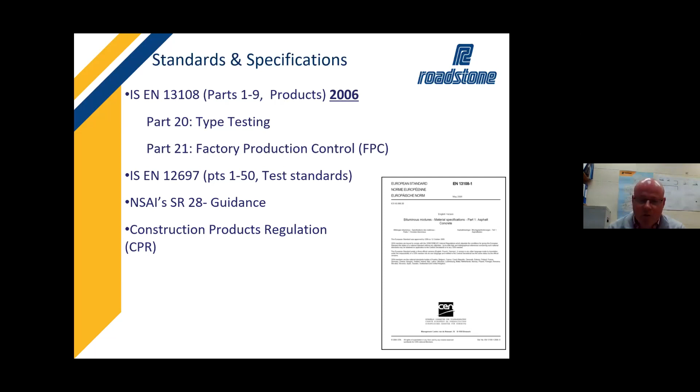Test standards are to the IS EN 12697 parts. There's over 50 tests there now at the moment. And of course, other standards that we're operating to in Ireland are the NSAI's SR 28. We'll go through that. That's a very good document for people to understand and know about. And also you've got the Construction Products Regulation that we're all operating to in Ireland for asphalt materials.

With the CPR requirements, all bituminous materials are to be CE marked to System 2+. That's a third party, such as the NSAI, comes in and audits an asphalt producer, to make sure that they're doing everything in line with the standards that are required for that product. Again, asphalt materials are a harmonized standard, so you have to produce a CE mark. Concrete, in another case, isn't a harmonized standard, so you don't produce CE marks and DoPs for those. So it's quite a different thing.

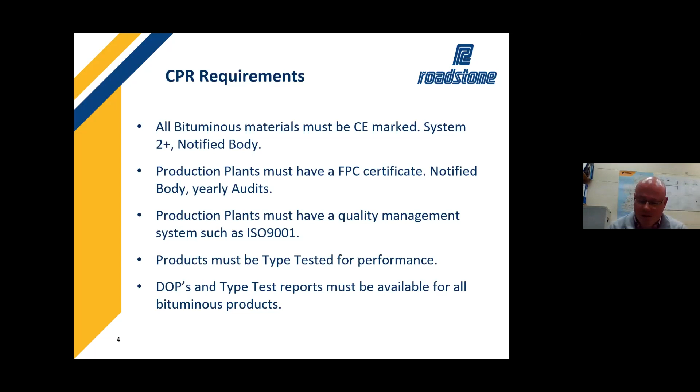In place in your company, in your actual production facility, you have your factory production control set up, you have a quality management system, and you're providing information relating to type tests and DoPs. They're very important things for the customers to actually take, and we'll go through parts of that further in this presentation. So the actual standards that we're producing to, the IS EN 13108, Part 1 is for asphalt concrete.

This is the old macadam specification. And you can see there just a little snapshot trying to give you an example of what the material looks like or how it's made up. It's a dense graded material usually. You do have open and medium versions of it, but it's also considered continuously graded. So the material doesn't have a sharp change in gradation. Now that does change up when you have open and medium grades, but the fundamentals of the material will be that it's continuously graded.

Your hot rolled asphalt, as you see there, the image of that, you have a lot of fines and then you have a certain amount of coarse aggregate. That amount of fines in it means that it doesn't have a texture of any nature, because it's so fine, it just produces a very flat surface. So in order to get that, you have those black chips on top, which is just pre-coated chippings going in. HRA would be a very popular material in Ireland over the last 50 years. But what's taken over from it really on the national road type works and different projects will be the stone mastic asphalt. To Part 5, SMA is a hugely popular mix.

It's got a stone skeleton in the mix, so you can see it's quite a coarser grade material, and that interlocks together and gives you a very high performing material for rutting, for deformation. You're also using good binders with it to give a good performance for water sensitivity.

Your porous asphalt below, we'll touch on porous asphalt as well this evening for sustainable products. And you can see that it's a more open material. It has interconnecting voids, so water can actually get down through it. And we'll display that later on with a short video that I have on a particular product that we produce.

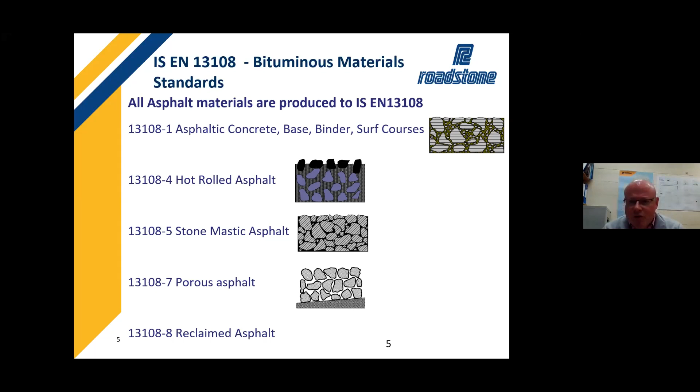Okay. In our actual production facilities, we run type testing on our products in order to produce them correctly to the European standards. We also have our factory production control system, which is to Part 21. And those two are very important documents to show compliance of our products on an ongoing basis at our plants.

On site itself now, there's a number of documents that people might use to show compliance with what is required by the client. So you have a document BS 594987, and that's a very good document. People use it for certain aspects, but again, it was sort of put together last minute because the European standards don't really deal with transport and lay and compaction of materials.

Here in Ireland, we don't have a version of that currently, but we are working on our own version, which is IS 844, and hopefully that will be coming out in 2022. It'll definitely be going out for a review in 2022. And people will get to comment on it.

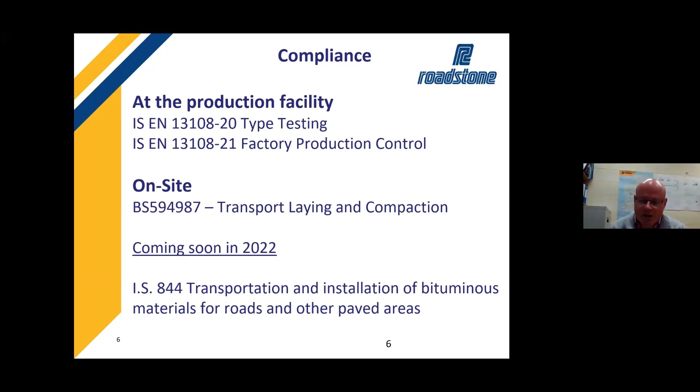Now, we'll go through a document here that we came up with previously, prior to IS 844, and we looked at why people weren't using some of these documents as well as they could. So really, we've gone back to basics on some of them and actually introduced a number of different things that made them more user-friendly. So we mentioned SR28, that's the standard recommendation for the use of the 13108 series in

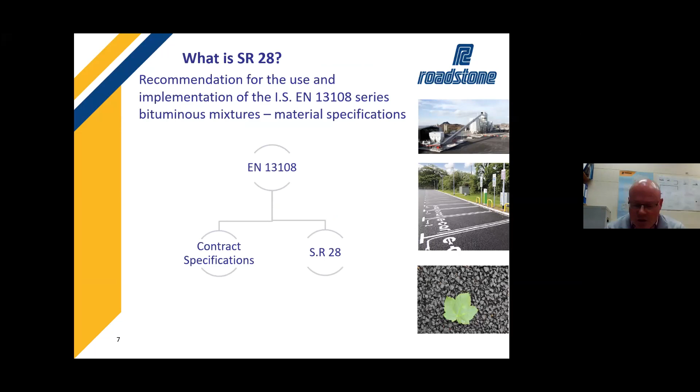Ireland. It's very important because it's directly linked to the 13108. And in Ireland, what we've done is we've actually broken down the basics of what are the end uses of these materials. Typically in Ireland, what should the mix design parameters be for the mixes, the composition and gradings of these, and conflicting requirements, just highlighting different things that we shouldn't be using these materials for or expecting certain performance categories of these materials, if we choose to use them. And again, we've got the mixture end use and pre-coated chippings, which is a specialist mix in Ireland.

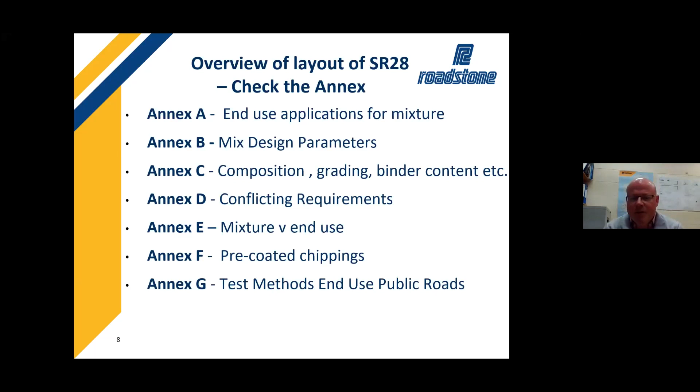Now, the reason why I've shown SR28, a lot of people maybe on this talk this evening aren't as familiar with the asphalt industry as they'd like to be. And SR28 is a very good document for someone to go and review and start to refer to with the types of materials and the end uses of those. So it's a very important document, I think, and a very useful one for people in the industry. So it's one to go and get if you don't have it.

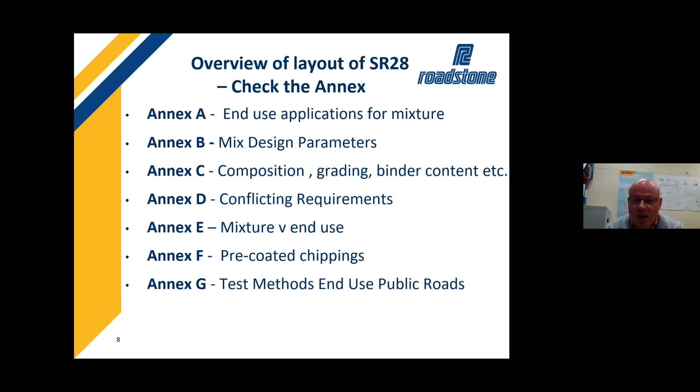Just to mention other specifications that are out there at the moment. You've got the likes of TII Series 900. Very important document there on national roads. Again, you might not be using this. This is high performance materials for high speed roads. And you might not need that in the situation you're looking for.

But what I would say, back in 2015, TII reviewed what they were doing, overhauled basically the Series 900 and took a different approach to how they wanted to have materials used on their roads as well as how they're designed. So previously you would have looked at recipe type mixes in there. They went down the design performance route with the new 900 series. So you now have a good focus on the air voids in materials, how stiff the materials are, what their water sensitivity performance is, what is the rutting performance of these materials as well. So a lot of high performance testing in there.

And in fairness, we've been working on it with TII over the years. And what we're looking at now is that they're maybe going to reissue a new version of the Series 900.

Maybe in 2022, I believe that they've been working on it, and I think they're awaiting comments from industry. But really, they're reviewing all these categories and performance levels that they've looked at over the last few years and seeing what they believe they can use going forward.

Now, another thing that will be coming out maybe in 2022 is the Irish Analytical Pavement Design Methods, which is again from TII. This is taking, I suppose, the actual performance of materials and designing the most efficient pavement possible for it. And so this is another approach to how to design pavements. The standard design methods at the moment nearly always bring you back to a minimum depth of a pavement, not really mattering how much traffic is going across it. So you never really get away from a sort of a standard pavement depth.

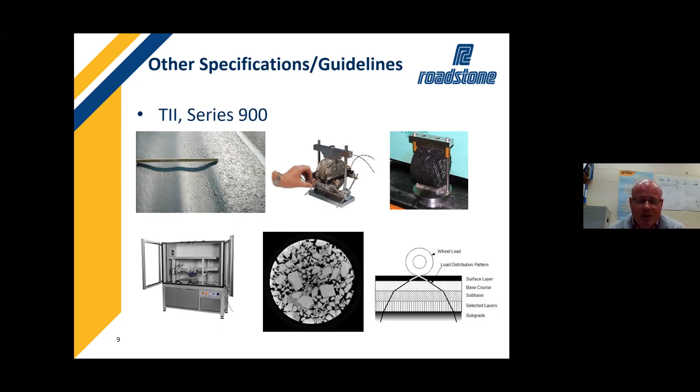Other specifications that you'll see on a regular basis, look, the Department of Transport and the Road Management Office have the orange book and the purple book there, typical uses for those. As I'm the IET chair, I'm going to give it a bit of a plug. We have the surface dressing guidelines for the IET. This is a very useful document.

What you'll find is it gives very good information on your constituents, on worked examples of how to design surface dressing, how to install it, and then aftercare of that as well. So it's a very useful document for especially the county council engineers that are out there, and the work that they will be doing on an ongoing basis on their pavements.

And outside of that, then you have the likes of the Ministry of Defence type documents. There's a series of these, and again, these are maybe slightly more not in common use across industry in Ireland. It's aimed more at the airports, but they might be documents that you come across every now and again. But they're there, they're in use. Most common ones, of course, will be what we've gone through already.

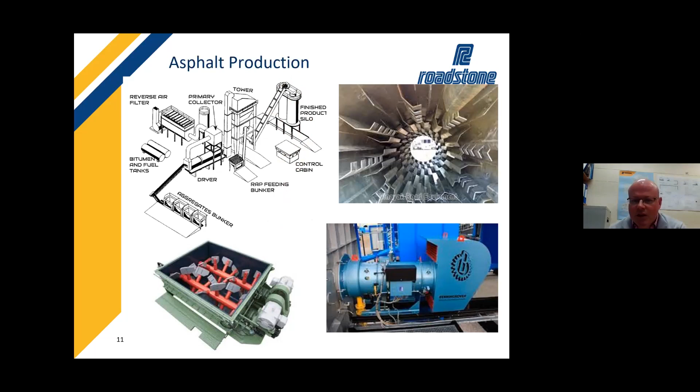Okay, we're going to touch on now the sustainable end of the asphalt industry and what we're doing currently to make ourselves more sustainable and how we're trying to become, I suppose, a bit greener. In the most prominent areas of this, we're leading the way with reclaimed asphalt. You have SuDS asphalt, we'll touch on that, and then there's warm mix asphalt as well. Three different things to go through and give you a little bit of information on.

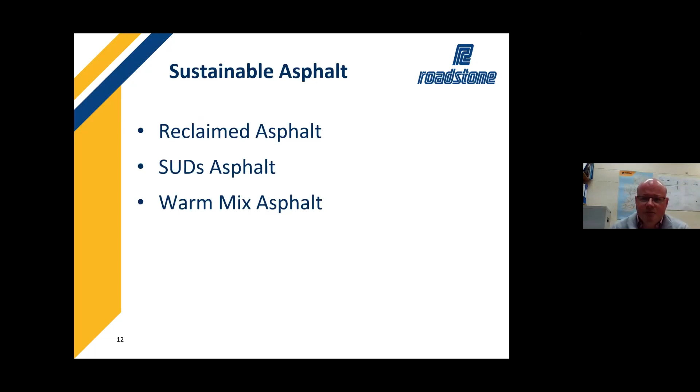Reuse of asphalt is a very important thing that I suppose we're getting to grips with in Ireland. Reclaimed asphalt has its own European standard, IS EN 13108 Part 8. It is 100% recyclable back into new hot mix asphalt materials. By recycling or reusing that reclaimed asphalt, you have the savings on the aggregates that would have to be produced, and of course the transport of those, as well as the bitumen that was being used. So it's a massive part in making our industry more sustainable, achieving a good level of recycling or reuse of these materials in an appropriate manner.

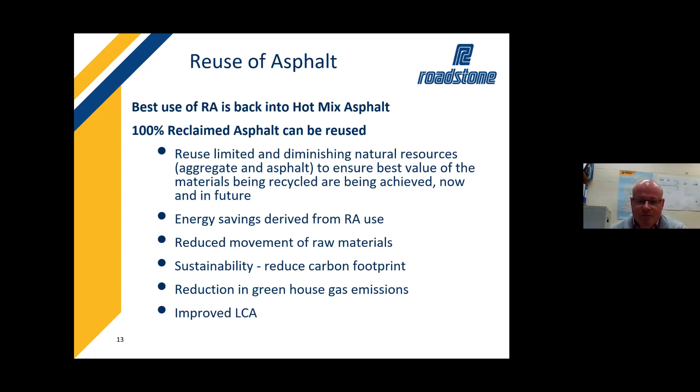Through this, we're going to have an improved LCA for these products. We're going to reduce our greenhouse gases. Now, in your ton of asphalt, we just did a calculation on your CO2 equivalent kgs per ton, and the two that you're saving on when you're reusing reclaimed asphalt are the aggregate amount and the bitumen amount. You can't recover the mixing, you can't recover the heat nor drying. Those things are lost essentially, but because you use the aggregate and bitumen again appropriately, you regain those, and that's recovering it.

Now, it's important to understand how you recover that, and that's through hot mix asphalt, because you're actually activating the bitumen, and so you're roughly recovering about 44% of the CO2 that was used. If people believe that by using reclaimed asphalt to build up road verges, that's recycling, really all that you're even getting close to recovering is that 4 kg. You're not getting close to that. You're only making a saving of maybe 8% of that CO2 that could have been saved. It's a minute amount compared to what it is.

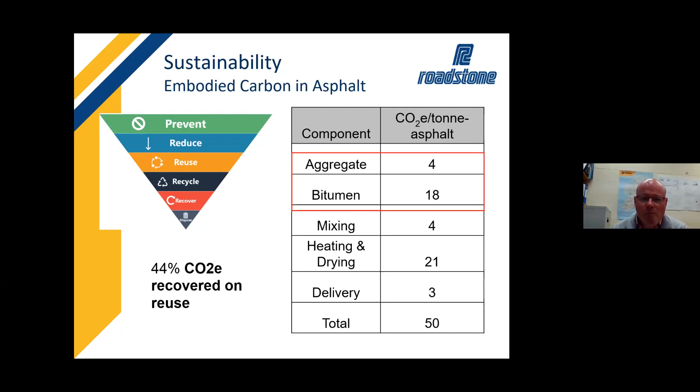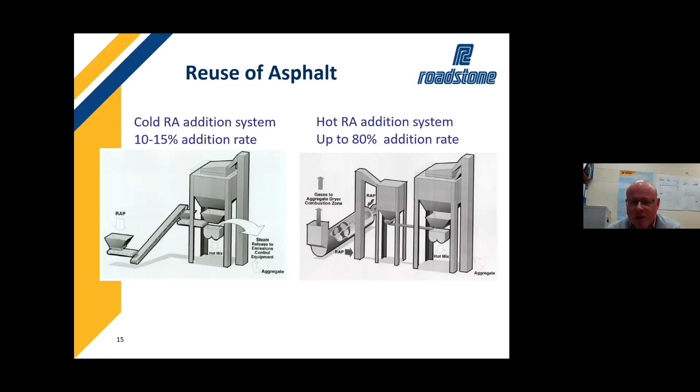When you're using reclaimed asphalt, you really have to have a good knowledge of what the RAP is, where it's come from. As you're using it, you need to be aware of the moisture content in it, binder contents, the properties of the actual RAP, so that you can design properly a material that will be suitable.

Again, you're trying to take out some virgin material, some virgin binder, put back in this RAP binder and the reclaimed aggregates. So you want to be sure that you're getting an equivalent material at the end of this, that you're not giving a lesser material.

And that's a preconception sometimes, that when you've recycled or reused reclaimed asphalt, that you're not getting that equivalent material, that you're not getting the same base or binder course that you had previously. That's not the case. When we're designing it, you're designing to have an equivalent material to meet those standards that are in place, so that it is going to give you the same lifespan as you had expected.

In Ireland, we're not currently recycling into surface courses. There have been trials carried out recently, I believe, with TII, and they were there a couple of years ago as well. It can be done, but I suppose there's limitations as to what can be done with it at the moment, as it's not within the Series 900.

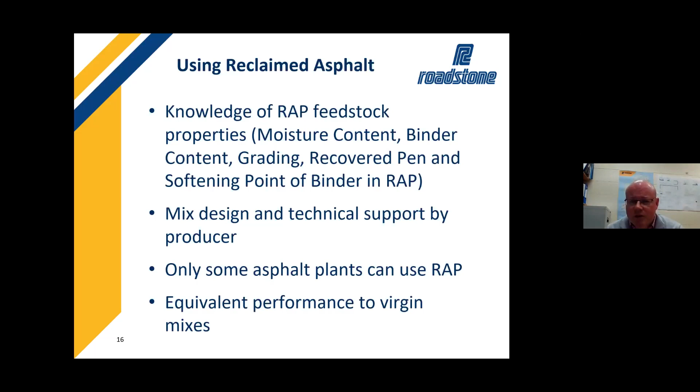That doesn't mean it can't be done on smaller scale works outside of the TII type works. This is a potential to be used in any type of contract if between the producer and the client an agreement can be made.

So another sustainable part of the industry, and I suppose no better time maybe to show this after the storm there over the last few days, is sustainable urban drainage systems. And this is trying to manage water and runoff on your site and not to have it causing flooding in different urban areas. And again, we're constantly building, we're constantly expanding. So we really have to manage this going forward, that, you know, we can all see the effects and what we can do about it now.

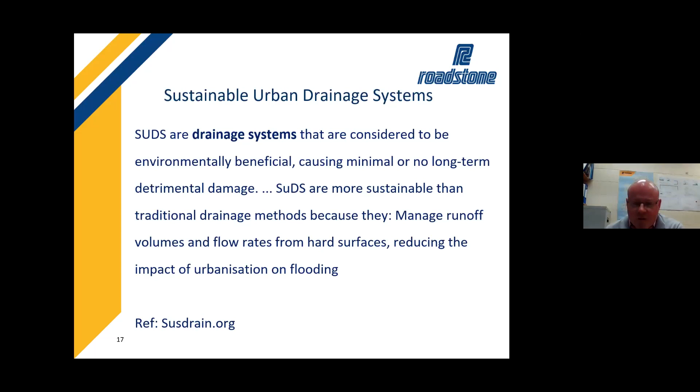And there are products there that we can use to help with this on different sites. So we have a DuraFlow porous asphalt. It's a SuDS system where we have a fully porous pavement. So you'll have a porous surface and binder course on top of a coarse grade of stone that sits on top of a geotextile or a geomembrane of some sort, maybe even a geogrid if it needs it.

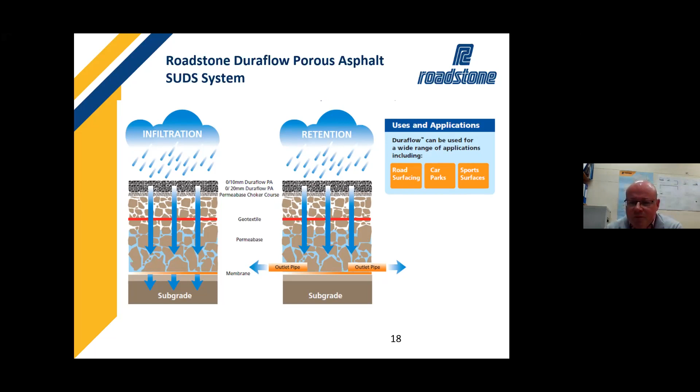And what that allows is the water to pass through the asphalt layers in situ on that spot, right there where it is, and then stores that water until it can either infiltrate through to the ground beneath, or you can attenuate it away through some pipe system. It's become very popular over the last few years, and we've done a number of large scale works around the country. You can see just a lab compacted specimen there, and the water just flowing through it.

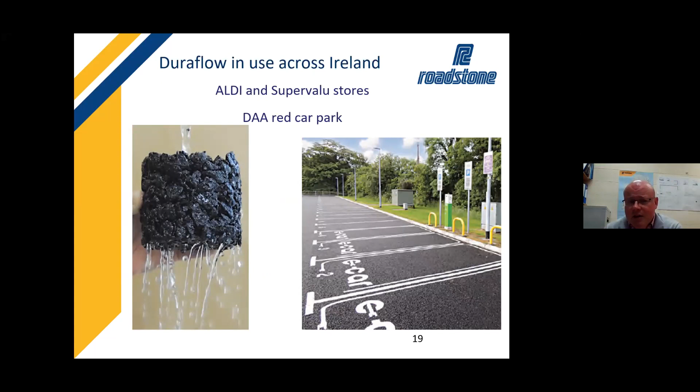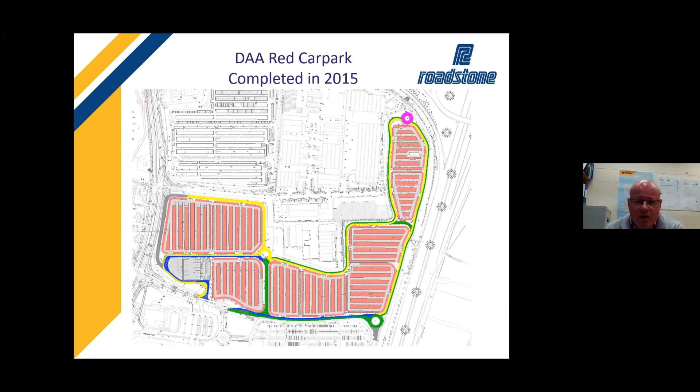The right hand side there is the Carrick Mines Park and Ride. I think we've got that down nearly 10 years at this stage. And we've also got the DAA Red Car Park. That's the overview of the site. I believe it was about 62,000 square meters of Permeabase DuraFlow put in on the site. It was a huge site. We believe it's one of the biggest SuDS systems in Europe. And it is a fantastic job.

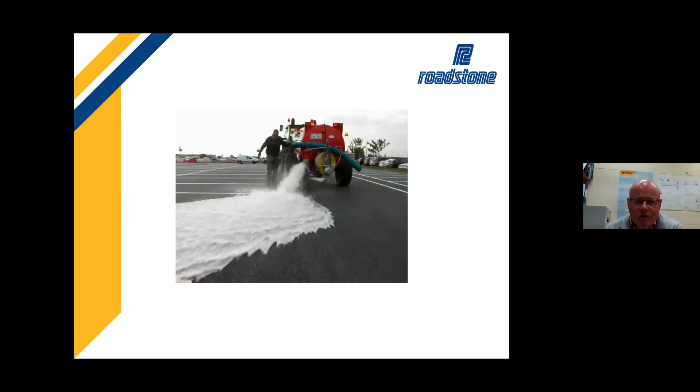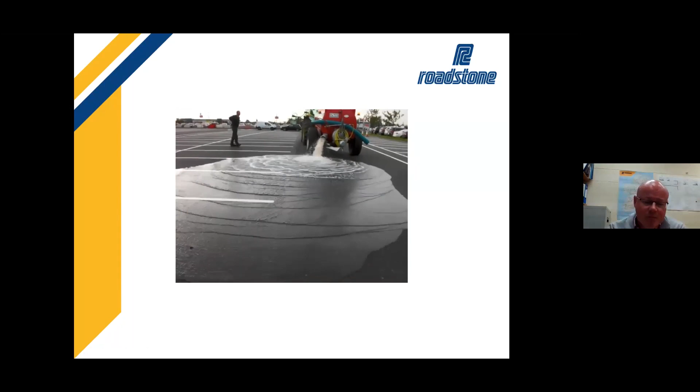We have a short video here to show you. Let's just see if it plays. So what the guy said, where the tractor is, you have standard SMA, which falls to the parking bays, which is all DuraFlow. So on the left hand side, you can see that the water is spreading out. And we'll just fast forward a little bit.

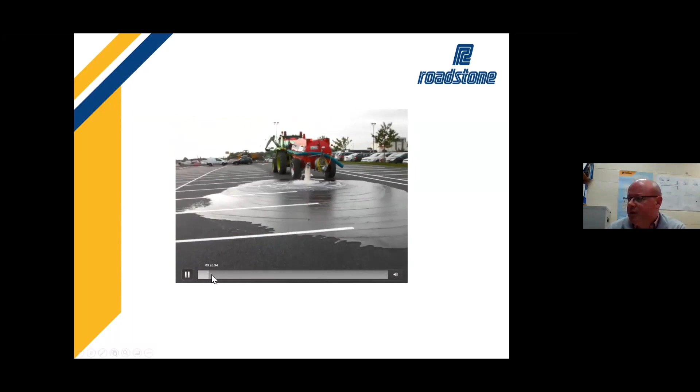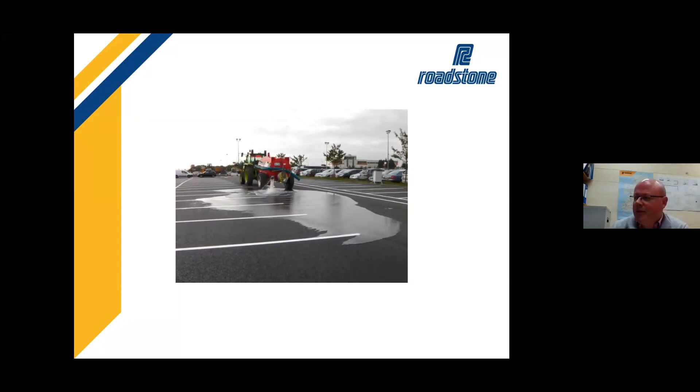Forty seconds in, and you'll just see the water flow is still high, but the water is really dissipating across the parking bays very quickly. The influx of water is very high into the material at that point, and the product can handle it. It's a very, very open material and porous, and the permeability is excellent on it to take this amount of water in and to manage it then in the stone layers beneath.

I have to thank Mark and Carol from the DAA for giving me that video. It's a nice video to show just how much water can actually be managed with that system.

It's a very good product for that, and again, it's been used in a number of car parks, such as Aldi's and Lidl's. You'll see them all the time, and we've done them in a couple of housing estates at this stage as well.

Warm mix asphalt. Warm mix asphalt is, I suppose, something that's quite new to the Irish industry. It's a generic term for the use of either a technology or a type of production technique that allows the producer to reduce the actual mixing temperatures. And this has a couple of different benefits depending on the type of additives that you're using.

Now, typical materials are made from 150 to sort of 180 degrees temperature. Your warm mixes are made anywhere up to 100 to 140 degrees, which is typical. After that, you're going into your half warm mixes or your cold mixes, which typically are emulsion based. Warm mixes are typically made with standard hot bitumens, but you have those additives that allow different things to happen in the mix.

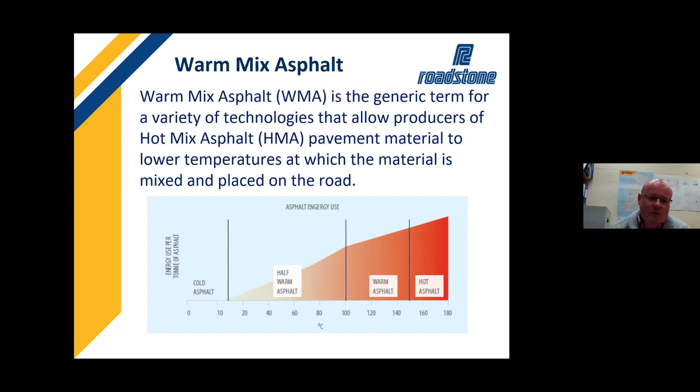Benefits of warm mix materials, again, that lower production temperature, a decrease in energy consumption. You've got your lower volatile organic compounds. You've got your NOx and SOx emissions.

The big benefit that a lot of the additive companies are saying is that because you've reduced the mixing temperatures, you've actually changed the environment within which you've made the materials. The bitumens will age as they're being produced, or as they're being made into asphalt materials and bituminous materials, because of those increased temperatures. So that aging and oxidation of the material doesn't get to happen because you don't have that higher temperature. Because of that, they believe that the materials will potentially have a longer life because they haven't had that initial phase of aging, and that they will outperform standard materials in the long run.

Again, I suppose this has been around a long time, but for ourselves in Ireland, we did trials easily 10, 15 years ago, but they haven't been followed up with on-site monitoring. It's one of these things that we're catching up on now, and there's been a number of trials this year to try and get more experience into the industry in Ireland and assess, are these a good potential for us.

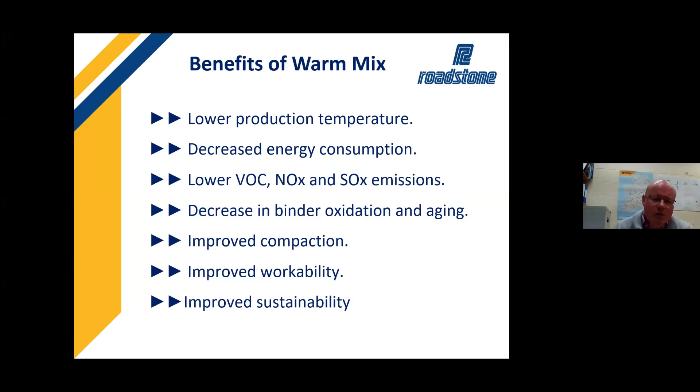So in September this year, we carried out a trial in Waterford. We made approximately 140 tons of AC14 surface course, and produced it at a temperature range of approximately 130 to 140 degrees centigrade. When we went to site, we noticed that the product laid as normal as you would see. You don't have steam, you don't have the usual smoke that you might see around the back of the trucks or as the materials are being paved.

The paving crew were a bit, I won't say standoffish, but they were just noting that it did definitely look different, but it laid the same. And in fact, they believe maybe that it had a more closed appearance in the actual pavement in the end.

I suppose it's interesting for us that this will be a change of mindset, not only in the production end, but also the designer's end and the end user's end and the guys installing it. Just because you don't see that steam, you don't see that smoke, it doesn't mean that you're going to change the product, that it's not going to compact as well, that you're not going to achieve a durable material. So it will take a bit of a change in mindset.

The plant data for that day, we analysed to see what the fuel use was like. Compared to other materials that day and in the previous couple of days, we did see about a 23% reduction in fuel use at that point in time. That would match what we've seen across the industry. They would say 15 to 25% is what they have noted in the past can be achieved when using these products. It's very interesting to see that we landed right where we were told we would be.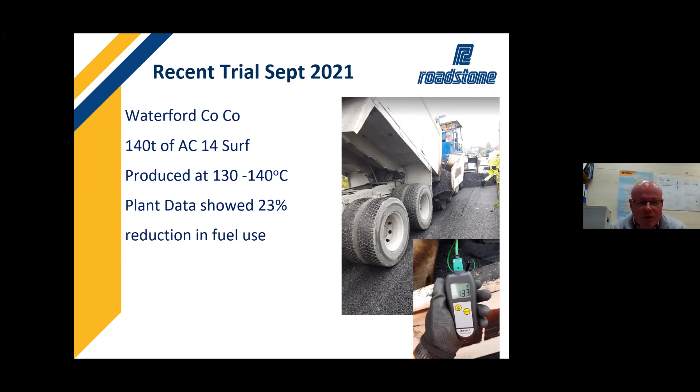The warm mix additives, I could give a bit more information on those. They vary as to their origins. Some are just chemical compounds. Others are byproducts of different production streams. One is the timber milling that produces an oil that they combine with one or two other products, and that gives it the properties to extend the working windows and compaction windows of the actual asphalt materials.

And then we've also seen a similar performance for resistance to permanent deformation. That's an interesting thing to see, because again, the aging process that normally would happen with the standard hot mix asphalt would result in maybe a stiffer mix, and that stiffer mix would usually result in slightly better permanent deformation. But on this occasion, we found that the two of them performed very similarly, so no big difference between them.

Just to note as well, this is a big moving thing at the moment in industry, warm mix asphalt. In the UK at the moment, the Highways Agency have announced that over the last 5 years they've done a lot of work with different companies, on different types of projects, and they really looked at the options for warm mix asphalt. And of course, they looked at the different types of warm mix asphalt that are out there. Like I said, there are chemical based ones, ones that use different oils, wax based ones as well, and then ones that use a foaming technology where water is sprayed into the mixer and it helps the bitumen expand and coat materials.

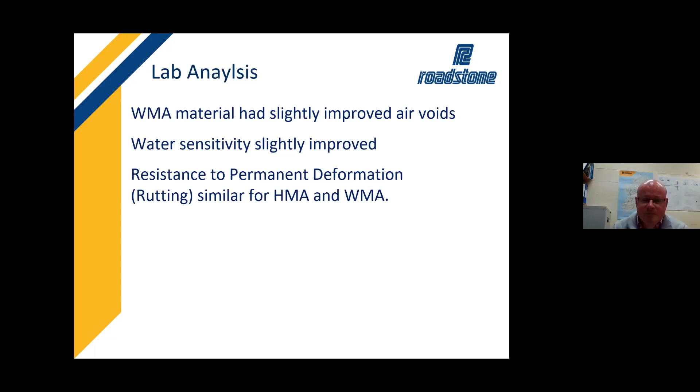The last thing that I wanted to really cover was environmental product declarations. This is something that is very, very new to the Irish industry. If anyone's worked in the UK, these are being talked about and there's some being used, but it is very new to the construction industry in Ireland. There are only a couple of products that have been certified to date.

It's not a very easy process to go through to get certification, but it is possible, and we as a company are moving that way. We believe that in 2022 we will be getting certification for a large range of our products. It takes a lot of information to get there, but these are the typical indicators that are expected for your declaration. There's a global warming effect, ozone depletion, and other factors as well.

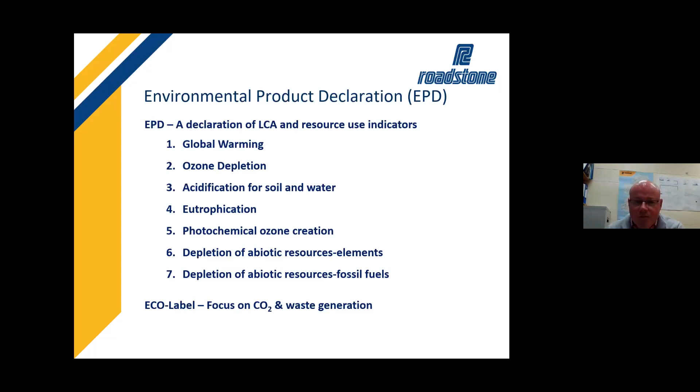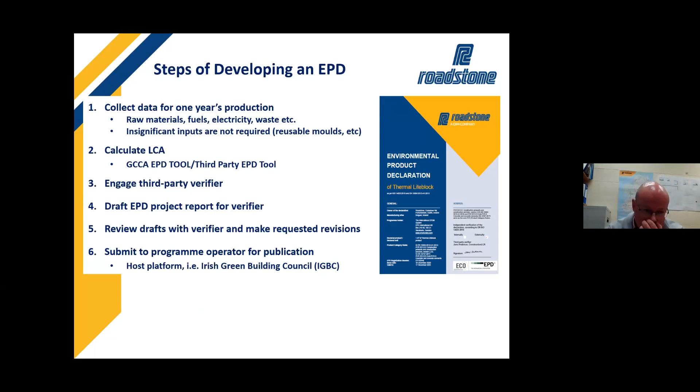In order to provide those declarations, these are the type of inputs that are needed: a lot of data on the actual raw materials, the fuels, the plant itself, how you use different parts of the plant, even down to the amount of maintenance being carried out in parts. You could maybe create your own calculator for this, but typically you go to a third party that has a verified system and use their tool to calculate it. You would then get another party to actually verify your EPD.

That process, until you have all the information gathered, can be quite drawn out, because it is a painstaking thing. It's excellent to see how far and in depth you have to go, and the amount of information that's needed. People may believe this is just there and ready to go. No, there's a lot of information that's going to have to be gathered, put together, and verified in order to get it finally over the line and produce these EPDs.

I think it's something that industries, designers and specifiers will have to start asking for. You might not get them straight away, but you should want to see from industry, the producers, that this is the way they're going to go. And that's the way we're looking at it now.

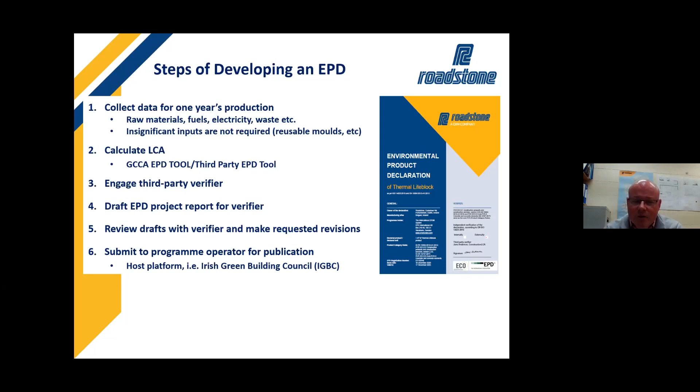As part of the life cycle assessment, you're taken through a couple of different phases for typical construction products, because you can't really take part in the actual project end of things. So usually the phases are sections A, C, and D, which is the product stage, how you produce it and the raw materials that go into it, the end of life stage, and even benefits from the materials themselves, which will be reuse, recovery, recycling potential.

And that's one good thing about asphalt. We've mentioned that asphalt is 100% recyclable. It can be reused 100% back into new hot mix asphalt materials. You get a very large carbon saving. You recover a large percentage of it, and that will have a big input into the EPD, how the material performs for that life cycle analysis. You can either say at the very start, I have a large recycled content in it, and that will improve the overall EPD, or at the end of it say, well, this is a recyclable, reusable product. At the end of its life, it will take on a new life in the same product again with the same life expectancy.

So it has a huge potential to provide a good EPD for asphalt materials and show just how sustainable they can be. And of course, if you include warm mix materials with the use of RAP, again, you get another improvement in the outcome of your EPD and life cycle analysis.

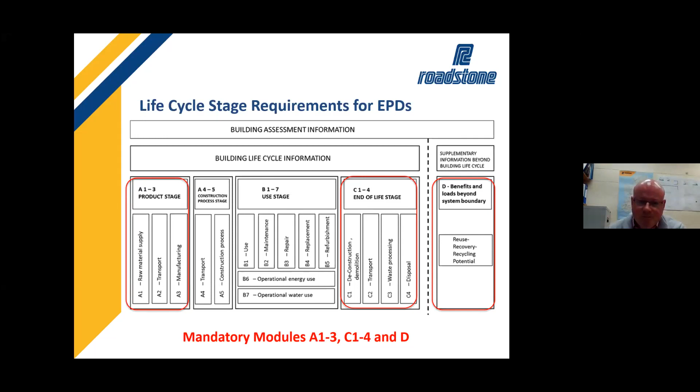Okay, that's the end of my presentation.